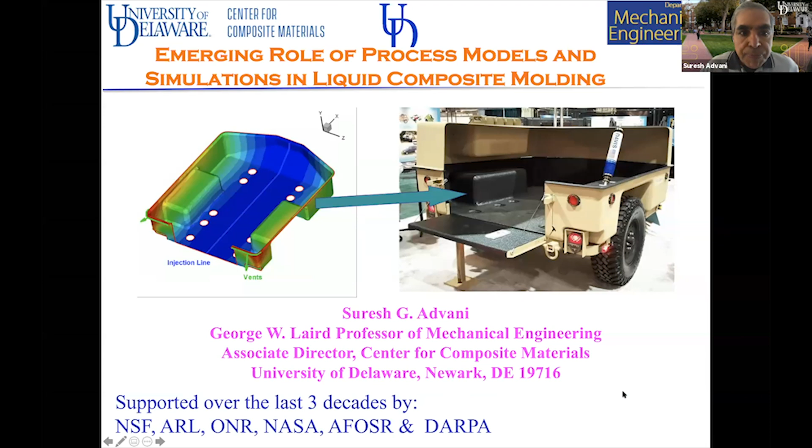So over the last 3 decades, I've been working in simulations of liquid composite molding, and I'll talk about what I've been doing. But before that, I just wanted to show you some history.

The Composite Center started in 1974 at Delaware. I think it was the first composite center. Then in 1978, Professor Pipes became the director and helped us win the NSF Center for Excellence ERC, the first ERC ever. After that, the center had never looked back with that momentum.

It continues to grow and continue to be recognized as a Center of Excellence by various agencies.

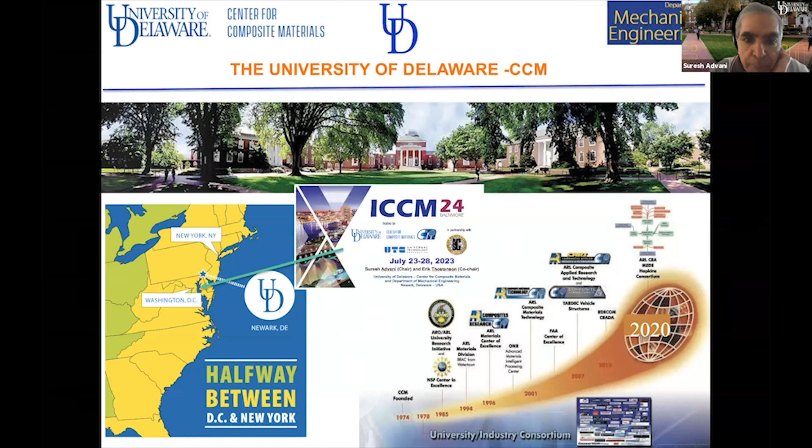Also, the next ICCM, the International Conference on Composite Materials, will be held in the USA, in Baltimore, in 2023. As you know, Baltimore is very close to Delaware, only 60 miles, and we weren't big enough to have such a big conference. One of the reasons we wanted to do this is because it's going to be the 50th anniversary of the center.

So, of course, before I start my talk, I want to really recognize all the real stars over the years, my graduate students and postdocs who have really contributed to everything I'm going to be talking about today. If it wasn't for them, we wouldn't have much to talk about.

So today, my goal is to give you a takeaway message: to demonstrate that process models and simulation do contribute to advancing and making manufacturing efficient. Today they're quite powerful tools, ready for you to use and build on to address the current manufacturing challenges in liquid composite molding. So that's going to be my takeaway message.

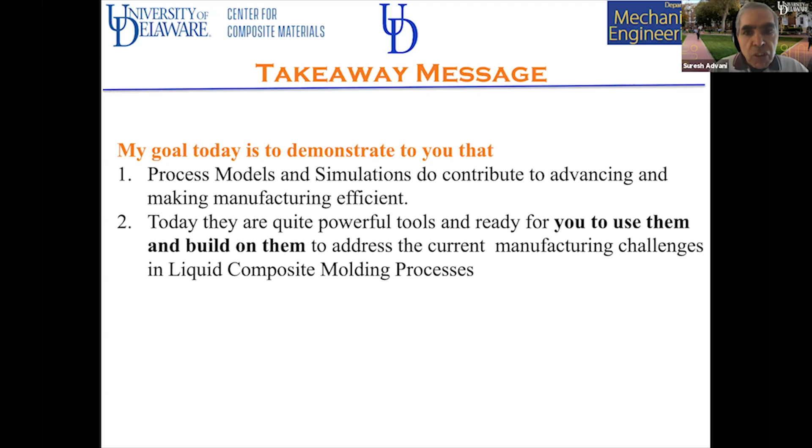For those not familiar with liquid composite molding, it's a family of processes where you have a dry fabric and you inject the resin into it using some sort of pressure or force. The most common one is resin transfer molding, where you have two rigid tools and you compress your fabric while injecting the resin under high pressure into the mold.

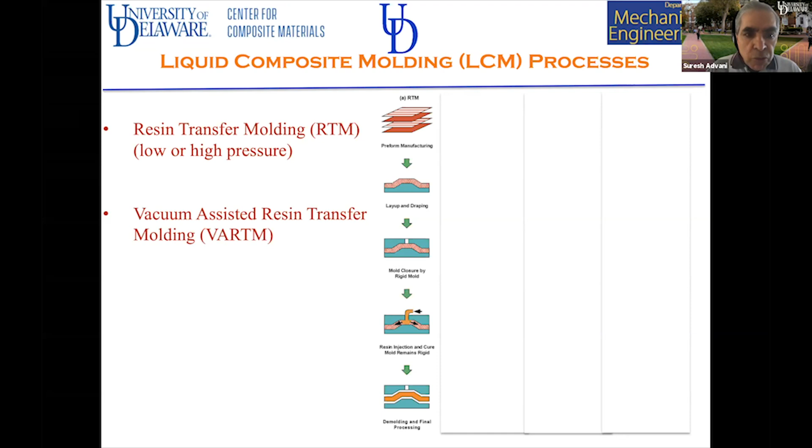Now, of course, you couldn't make a wind blade like that because the mold would be huge. So vacuum assisted resin transfer molding allows you to make large parts by, instead of pushing the resin in, pulling the resin in with just 1 atmospheric pressure. So you don't need a rigid top to keep the pressure in, and that's the VARTM process. Usually, because you only have 1 atmospheric pressure, you use a distribution media that allows the resin to flow into various corners of the mold. I'll talk more about it.

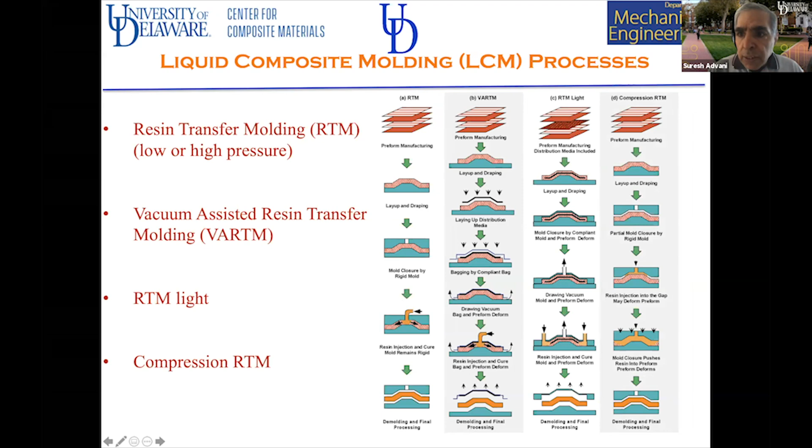Then RTM Light is a variation, kind of in between the two, where you put a compliant tool on top which allows you to normalize the pressure. Compression RTM is more important here because it reduces the cycle time. Instead of having a distribution media, it has a gap - you inject the resin into the gap, close the mold, and then push the resin into the dry fabric.

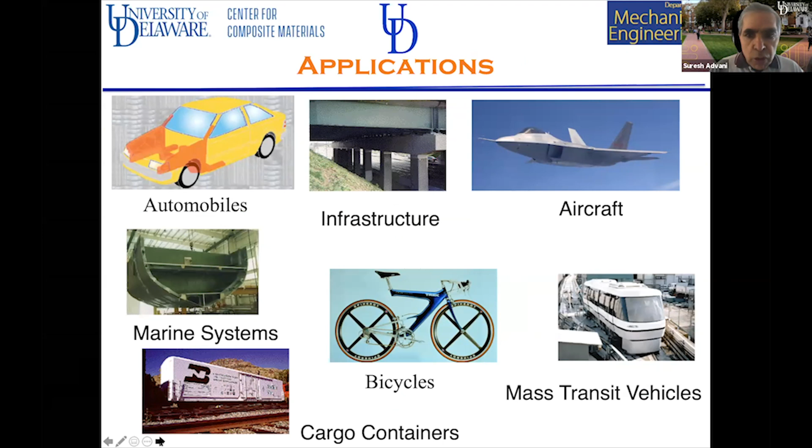So those are some of the processes, and you can make very complicated parts with them, applicable to aerospace, automotive, and sports industries, and you can make very, very large parts with that. As I said, RTM and VARTM are the two main processes I'll talk about.

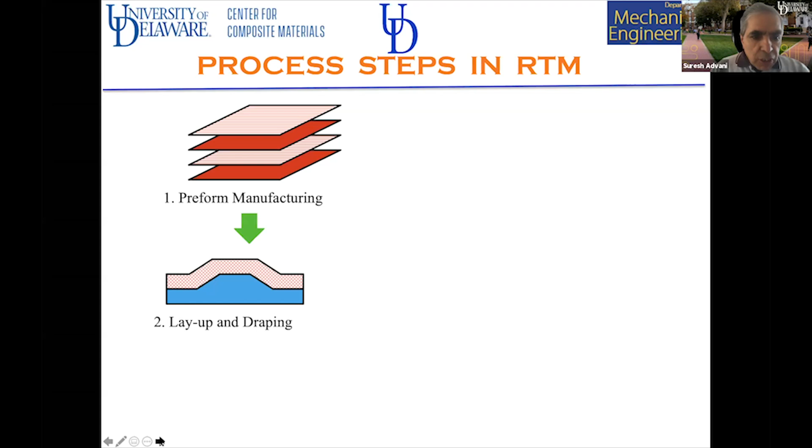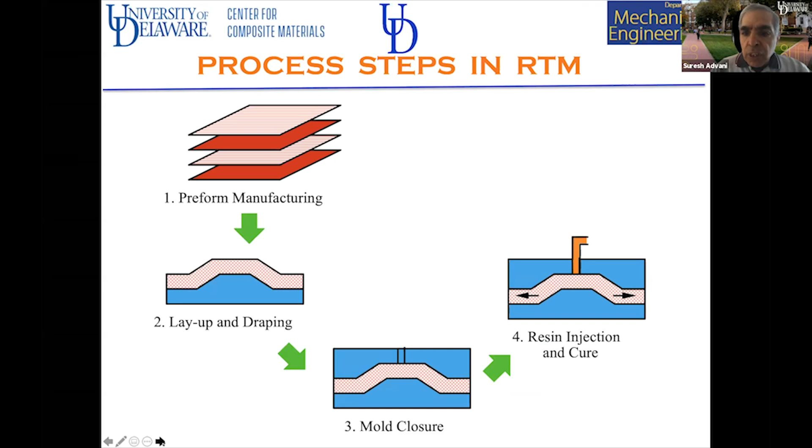So I'll give a little more introduction here. You take the fabric, place it on a tool, then close the mold with the rigid tool, then inject the resin until it reaches the vents, and keep the mold closed until the part cures, then demold the part.

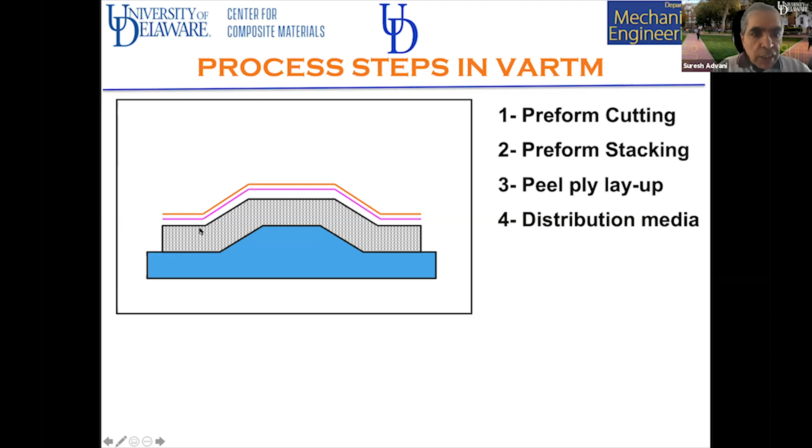In VARTM, you have basically the same thing where you have a rigid tool on which you lay the fabric, and then a peel ply - everything above the peel ply you discard. After that, you have a distribution media that allows the resin to flow faster in the in-plane direction, so all it has to do is go through the thickness direction. This allows it to flood the top surface, which is helpful.

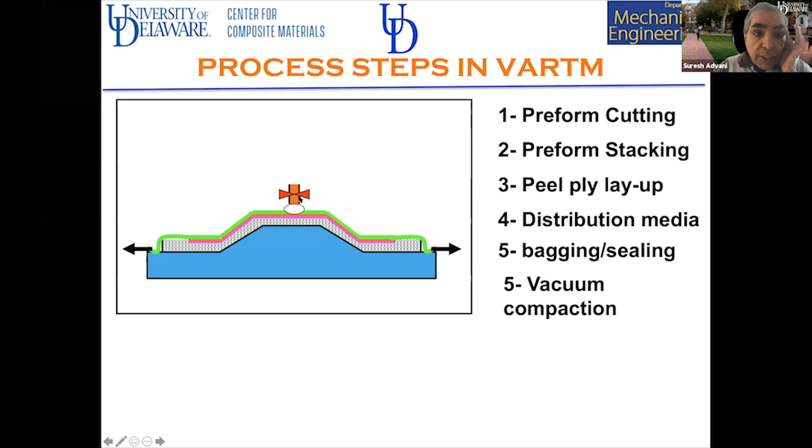Then you put a vacuum bag on top of it and apply vacuum to compress the preform to get the fiber volume fraction. After that, you open the resin, which is at atmospheric pressure, and it starts to fill the mold and go toward the vent. You keep the vacuum on until the part cures, and then you demold it.

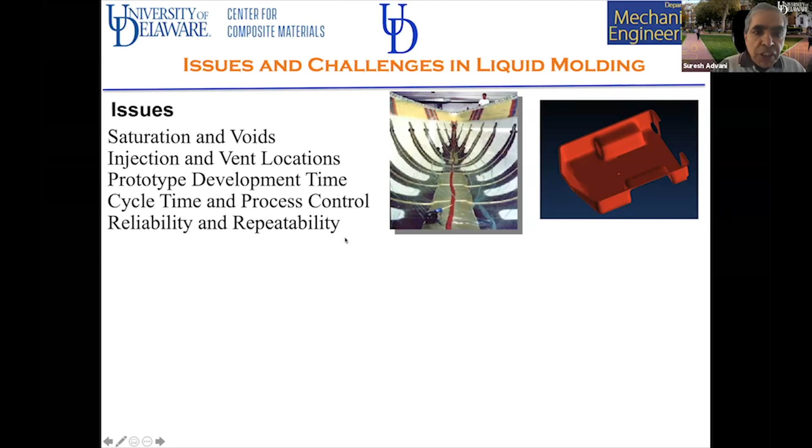So what are the issues in this process? Can I saturate all the fibers, all the regions in between the fibers? Otherwise I'm going to have a lot of voids. Where should I locate my injection and vent locations? How much time will it take to develop a prototype? How do I reduce the cycle time, and can I introduce process control? The biggest issue is reliability and repeatability - can I repeat this part?

So there are many challenges, and one can address these by integrating flow modeling in prototype design, accounting for material and process variability, dimensional tolerances, and introducing process control and automation so we can manufacture large and complex parts. Hopefully I'll show you some examples today that convince you we are very close to being able to take simulations and address all these challenges.

So, in mold filling, why do we need a simulation? The reason we need a simulation is because when you close the mold, you cannot see anything inside.

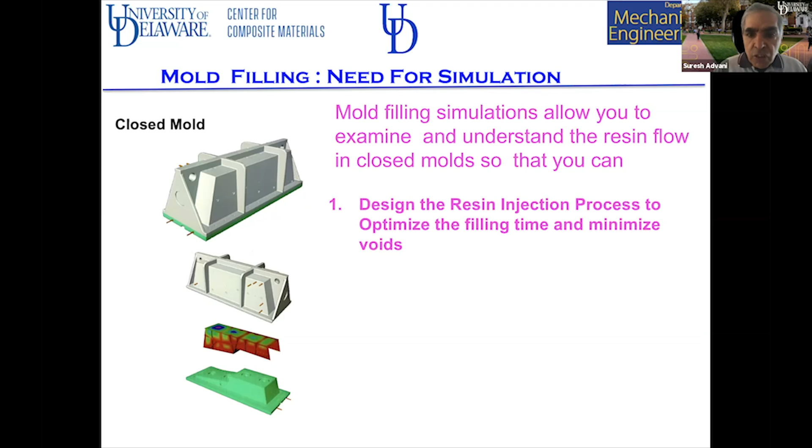Once you wait for the resin to come out of the vent and you open the part, you may end up getting voids in the part, and then you have to throw away the part because it's already cured. So simulation allows you to see inside and design resin injection processes to optimize the filling time, minimize void, reduce the development time, integrate the process with the mold design, and address the material and process variability by passive control to improve yield, or have active control and automation.

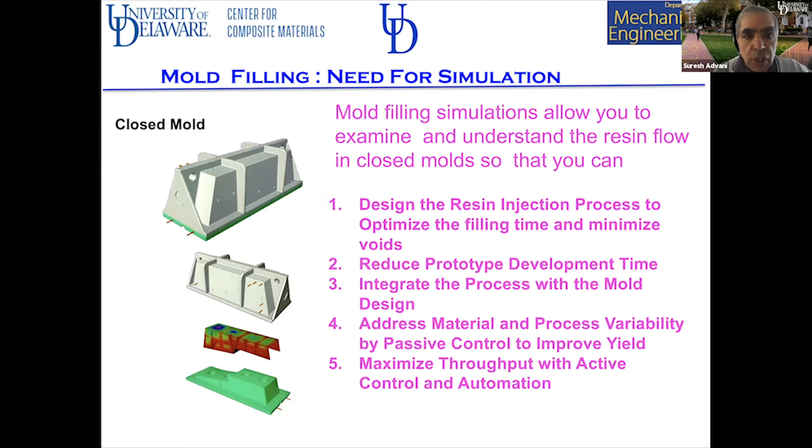I'll show you examples of those. My second thing is to talk about the science behind this modeling and simulation, and maybe more about the features of what it can do.

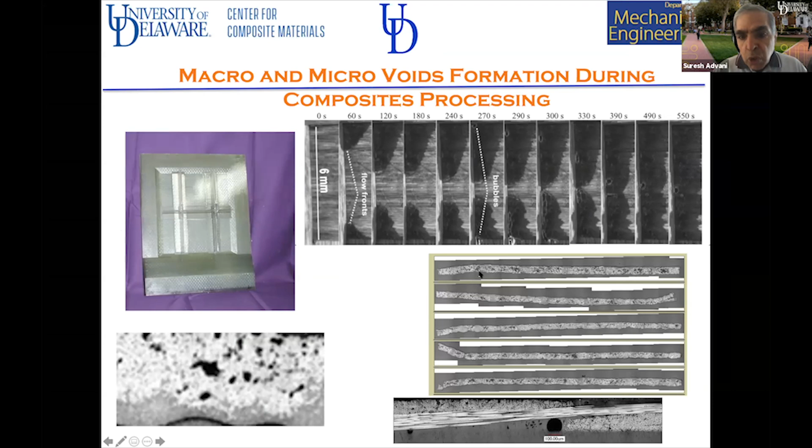As you can see, you can have micro scale or macro scale voids, because you can end up getting voids inside the fiber tows, or have dry spots like this, which you can see by the naked eye. And sometimes you have micro voids, which you have to go under the microscope to see. So this is the issue we want to address.

So we'll address this at three levels. At the macro scale modeling, where we can predict the dry spots and the voids, and how we can use design, optimization and control.

Then we can go a level below and couple the two. So the level below is that you have fiber tows, and then you have the region in between the fibers. You can look at how you're saturating the tows along with creating the dry spot. These two are connected, so we can look at dual scale flows.

And then finally, at the micro scale level, within the fiber tows, you can get voids because of how the resin spreads, what is the capillary effect, and so forth. So the idea is that you can address all of these three issues through simulation.

So first we look at the macro flow. At the macro flow level, we model the flow as Darcy's flow through porous media. Basically you inject the resin at some point, and as the resin moves, it follows Darcy's law, which is the average velocity is proportional to the permeability of the fabric and to the pressure gradient. Then you combine this with mass conservation to get a governing equation in terms of pressure.

With the boundary conditions, at the inlet you can have a constant injection pressure or pressure changing with time, or you can have a flow rate changing with time or a constant flow rate. So you can do all of that.

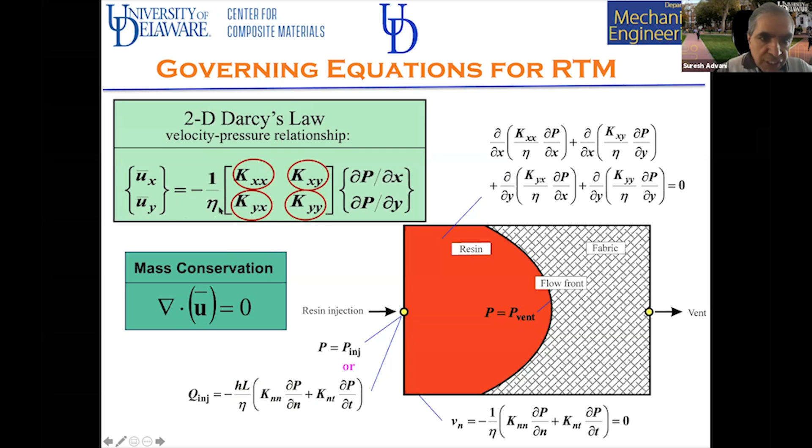And you can do this in 3D flow, because the flow is also going through the thickness as you're flooding the top surface. So now here you have more permeability values to find: the permeability in the X direction, Y direction, Z direction, and if the fabric is not aligned in the flow direction, you also have these cross permeabilities to find.

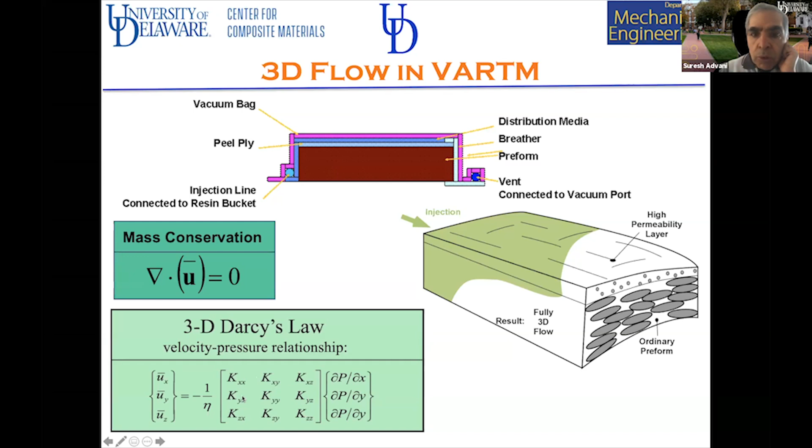The way we do it is we don't remesh the problem. You create the mesh and then associate a fill factor with every node. When the fill factor is zero, that means there is no resin there. If the fill factor is one, that means it's filled with resin. And when the fill factor is between 0 and 1, you know that node is on the flow front. So we use that idea and avoid the problem of remeshing.

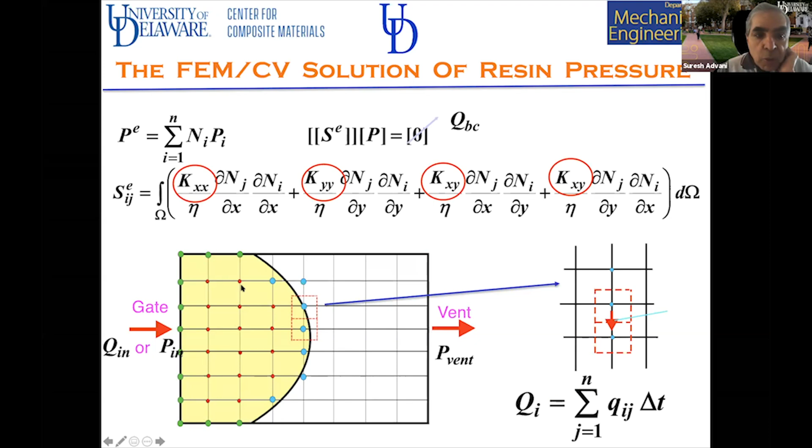And obviously, we need to know the permeabilities of the elements, so you can actually have element-wise permeability, which can change in each element.

To measure the permeability, there are all kinds of measurement benchmarks going on right now, because this is a problem where every time you do an experiment, you get a different answer. So you have to come up with a very good way of doing this.

We have a few techniques we've come up with, where we look at the top and the bottom, and then use that to measure the permeability in the Kx, Ky, and Kz direction. Notice here that usually the Kzz, the through-thickness permeability, is much, much lower than the Kx and Ky, up to 2 to 3 orders of magnitude lower.

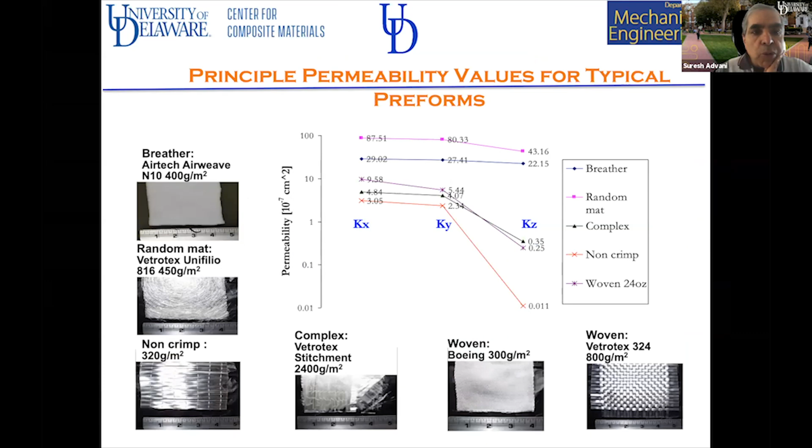And this, in certain contexts, could be an issue. And then, of course, as you lay the fabric, the fiber direction changes and the fiber volume fraction changes.

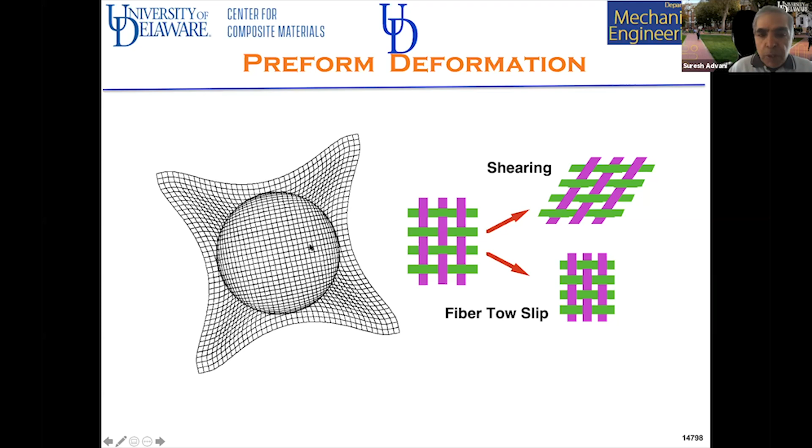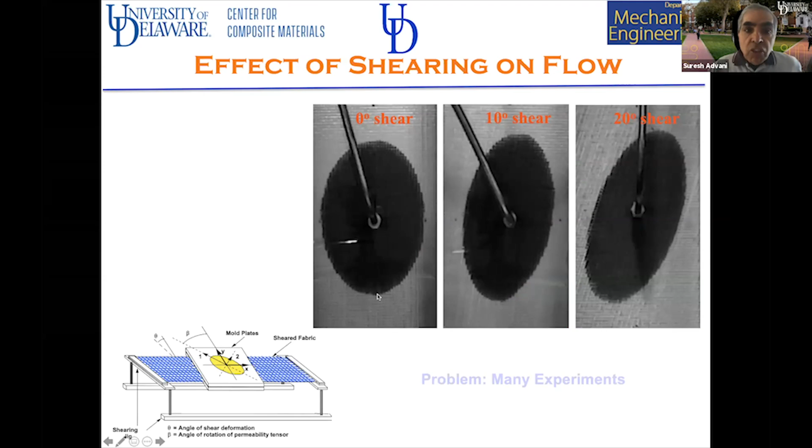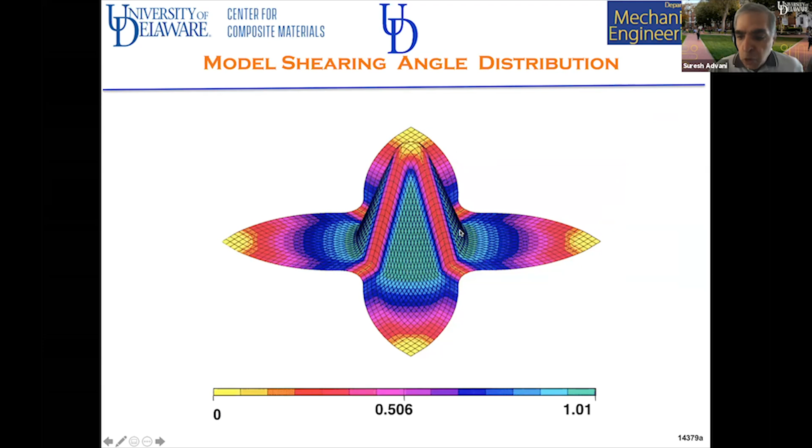So you have to couple this with a drape. When you drape this, as you can see here in the experiment, as I shear the fabric, the direction of the flow changes, and also the fiber volume fraction changes. So one needs to be able to not only measure the permeability in the mold, but then have a way to take something like this, drape it, get the fiber volume fraction of the draped fabric, and convert that into permeability values before solving the flow problem.

One of the things we've been recently doing with one of my collaborations in France is using a paper to look at the pressure that is applied on the fiber tows. From that, we can reconstruct how the fabric looks inside the mold when it is closed. This will allow you to get a much more accurate permeability value.

And so once you have the permeability values and the mold designed, you can use any kind of software to create this GMesh or any CAD profile. And then if you need to drape the fabric, you'll have some way to convert that. You input that into the simulation model, and the simulation allows you to find flow fronts, the pressures, temperatures, and also the saturation of the tows.

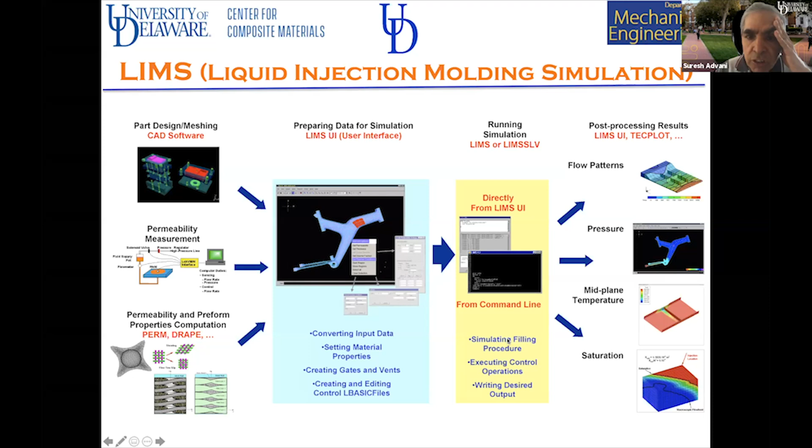It's a nice research tool, because you can actually write sub code that will allow you to introduce control. It will also allow you to change the filling procedures and so forth. So that's one of the big advantages.

And over the years, we have validated the simulation with all kinds of experiments that we've done. This is like a 4 foot by 3 foot window frame, and you can see on the left is your experiment, on your right is the simulation.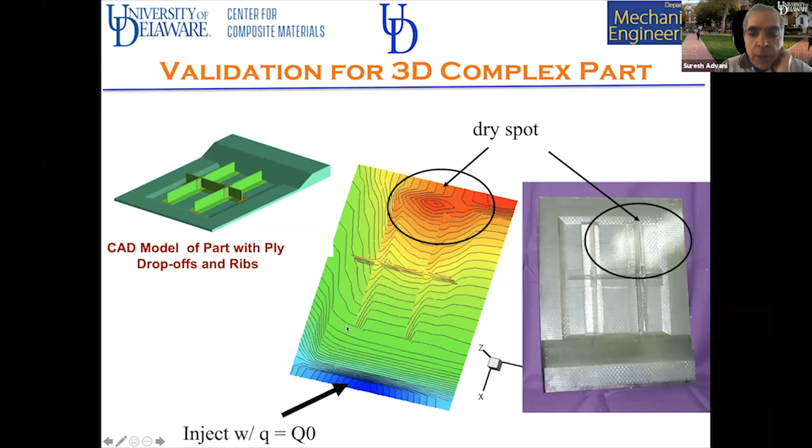We were able to even predict a dry spot that happened in this part by applying those same conditions. It can do any complex 2D and 3D parts without any problem. Many years ago, we were already able to do that.

The other thing I was talking about is that you can write a small script file which allows you to do things inside the simulation. For example, if you're trying to find the best gate location, you can write a small script and keep changing the gate location and finding the fill time. It can do this all in the background to tell you which is the best gate to use.

Now, of course, you don't want to do this in a brute force way. You want to use some sort of techniques that allow you to find the best location to fill for the least amount of fill time.

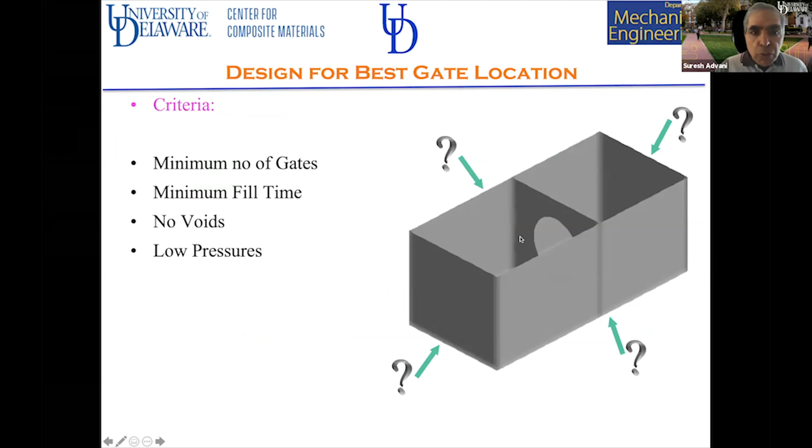So if you have a part like this with 3,000 plus nodes, instead of running the simulation 3,000 times, you can use techniques such as branch and bound search, where you break the mold into different sections and keep moving toward the one giving you the lowest fill time. That way, you can end up with the actual region that has the gate giving you the minimum fill time.

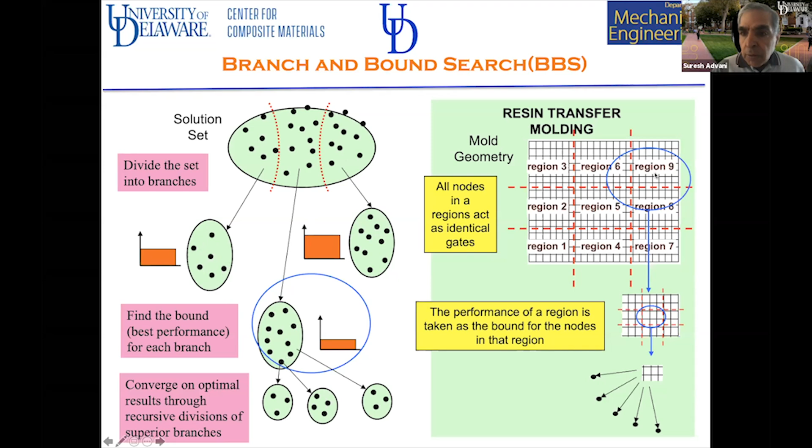So you can see here the branch and bound method only took 57 simulations, as compared to if you were to do this by brute force, which would be 3,378.

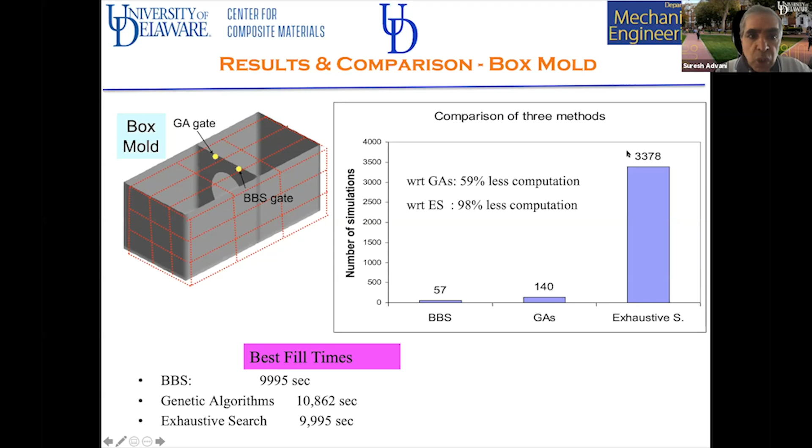If you use genetic algorithms, it takes about 140 or so simulations, and it doesn't give you the exact gate location, just close enough. Whereas the branch and bound method gave you the location that you get from 3,000 simulations. So this shows how you can use optimization with it.

Now going to the next level, the mesoscale modeling. How do we model flow inside the fiber tows? If you look at this mold, it's much darker here compared to here because the fiber tows here are not completely filled yet, since you have bigger gaps between the fiber tows. So the fiber tow permeability is lower than the regions in between.

If you don't use dual scale, then LIMS assumes that the tows and the region in between the tows fill at the same time. But if you turn on the dual scale feature, it will actually tell you how these tows are getting saturated while the resin is moving into the mold. As you can see, these are all dual scale fabrics.

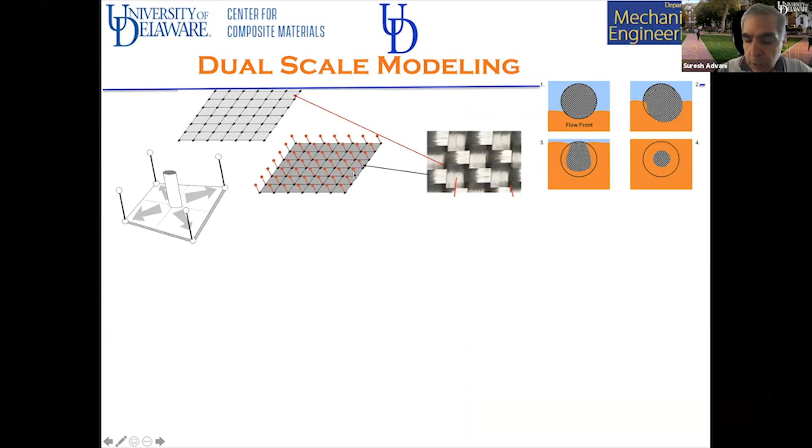So in the simulation, for the 2D or 3D elements of the mesh, we attach one-dimensional elements that represent the fiber tows. They have their own permeability and their own volume to fill. But now, we need not only the permeability of the bulk that you measure from experiment, but also the permeability of the tow. So you need two parameters.

Let's say you inject from here, and as the resin is filling the mold, the red area is where all the tows are filled. Between the two black lines is where you have partial saturation of the tows, as seen here. When this front reaches the vent, you might think the mold is filled, but you still may have some unsaturated tows. So you have to leave the vent open so that the resin bleeds through it until this red front reaches the other end, which will ensure all your tows are filled. So it can give you that sort of information if you know your tow permeability.

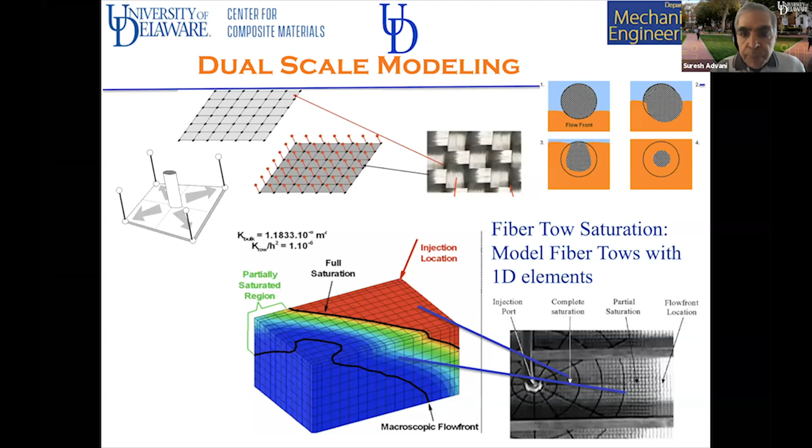So you'll say, okay, now that means I have to measure two values. We came up with an analytical method to measure both values from one experiment. You inject the resin at one end at a constant flow rate, and the pressure profile will be linear with time at the inlet if it's a single scale fabric. If it's a dual scale fabric, you'll see the pressure profile is actually a drooping pressure profile because the tows are filling at a different rate.

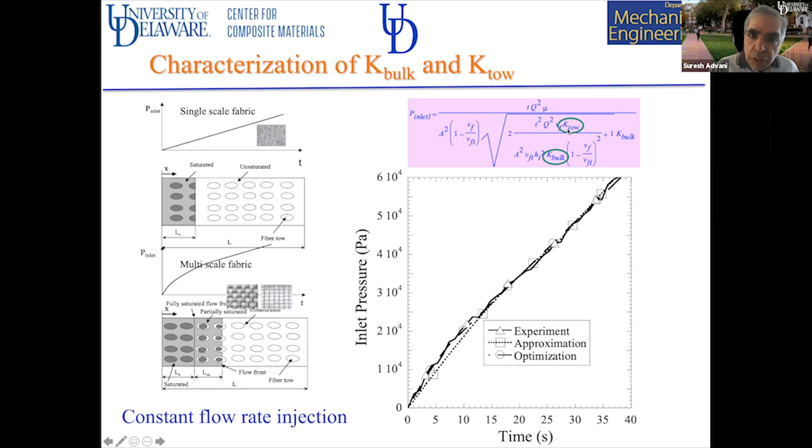So what we do is experimentally measure this profile, and we have an analytical expression for how the inlet pressure changes with time as a function of the tow permeability and the bulk permeability. We try to match that by changing these two values, and by doing so, we can match the inlet profile and get both values from the same experiment. It's not as hard as it seems because usually the slope at the inlet is more representative of the bulk value. So from this slope we get the bulk value, and then you just play around with the tow value till you can match the pressure profile.

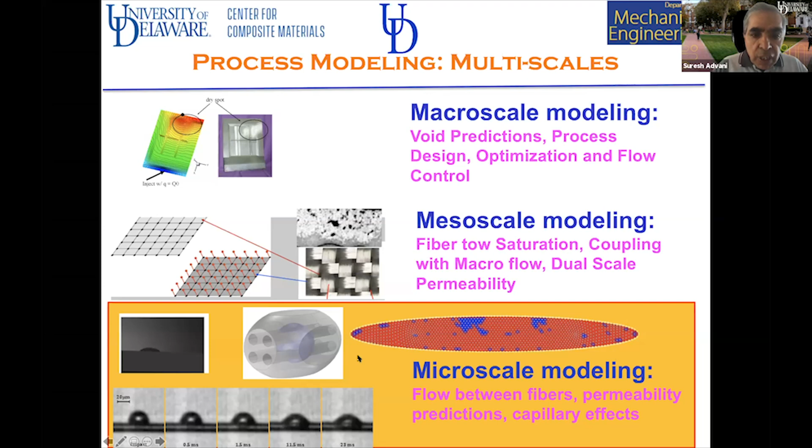And then finally, the third scale that I'm looking at is the micro scale, what happens because of the capillary effects, and how does the capillary play a role here, and what about the contact angle that the resin has with the fibers.

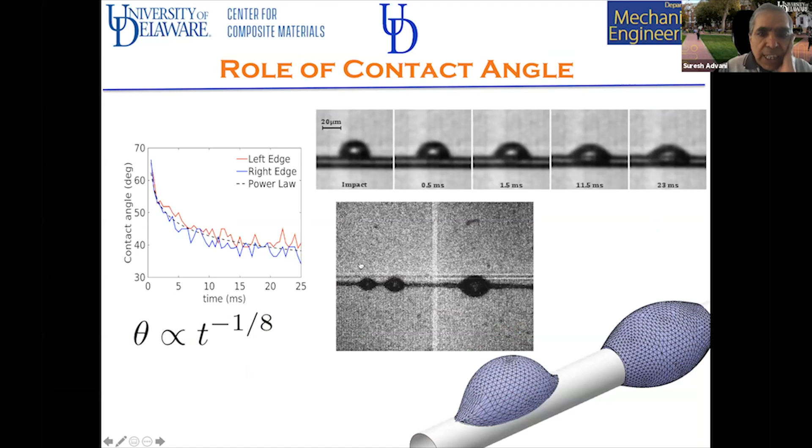You can actually measure the contact angle on top of the fibers, and usually as you change the contact angle, you'll see the average capillary pressure changes. So we were able to simulate that and come up with an average capillary pressure depending upon the distance between them and the contact angle. We show here how the average capillary pressure changes with fiber radius and with the contact angle. Also, as you move one fiber closer to another, you notice that the capillary pressure will also change.

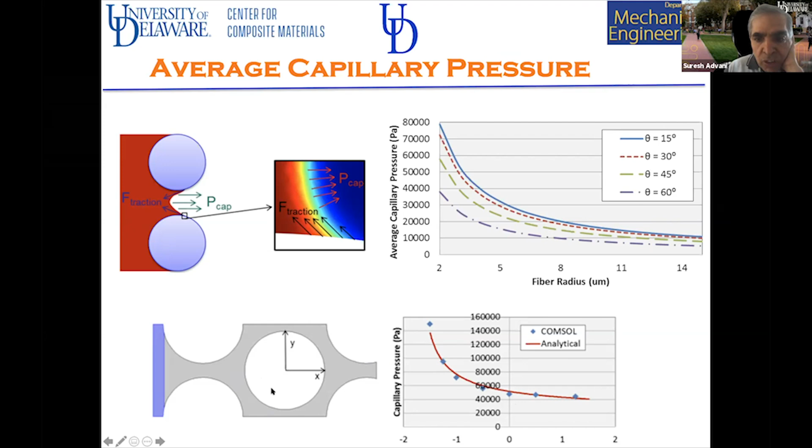So basically, as the fibers move closer, it is higher, and as you move it away, it is lower. So you can even address those things.

Here, what I'm showing you is that we have a way in LIMS to attach elements where we can assign capillary pressure, and then we can look at the effect of capillary pressure as compared to the injection pressure. On the top, when you're looking at the tow saturation where no capillary pressure is applied, you can see that you have a much larger region that is empty, whereas when you account for the capillary pressure, a much bigger region is filled. So the difference is not that huge, but still it can be accounted for.

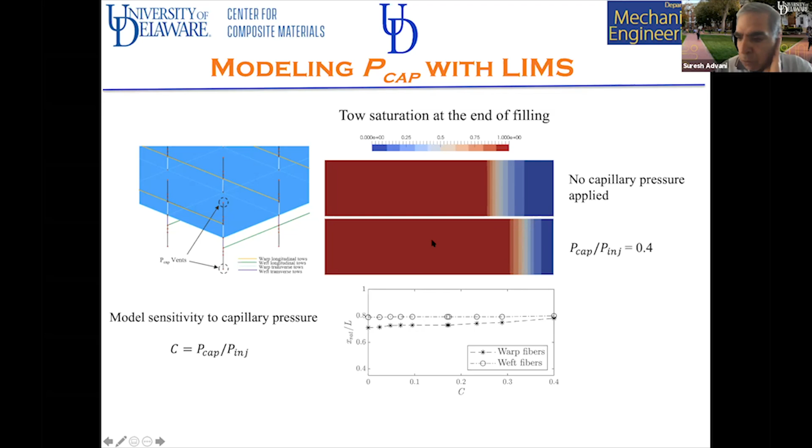Okay, so that was about the simulation. Now, how do we account for material and process variability in the simulation?

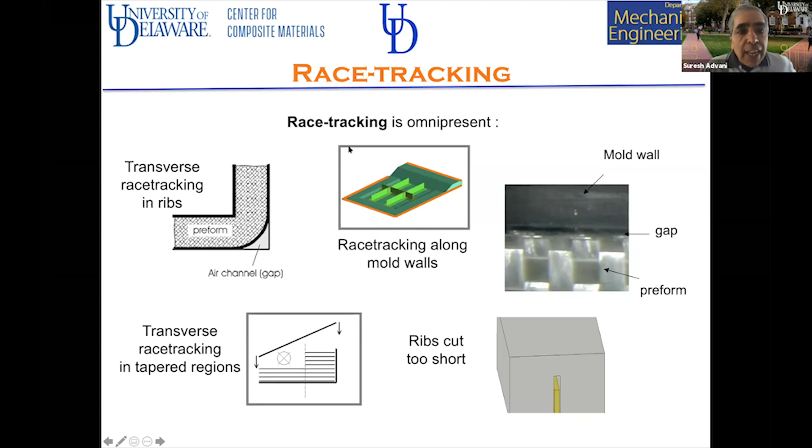What happens in these processes is that when you lay the fabric, there are gaps, there are channels, and the problem with that is that the resin will go faster along the channels, so the permeability is much higher, and we call that race tracking. And that race tracking is present everywhere. There's nothing we can do to prevent it.

You can see how the race tracking will make the flow go faster along the edge, and that can mess up your part, because let's say you put in a vent here after you did the simulation with no race tracking. The vent should be here, the last area to fill, but because of race tracking, the resin went on the top and the bottom, and it arrived at the vent sooner than it was supposed to. Even if you let the resin bleed, you cannot completely get rid of this void. So accounting for race tracking becomes important.

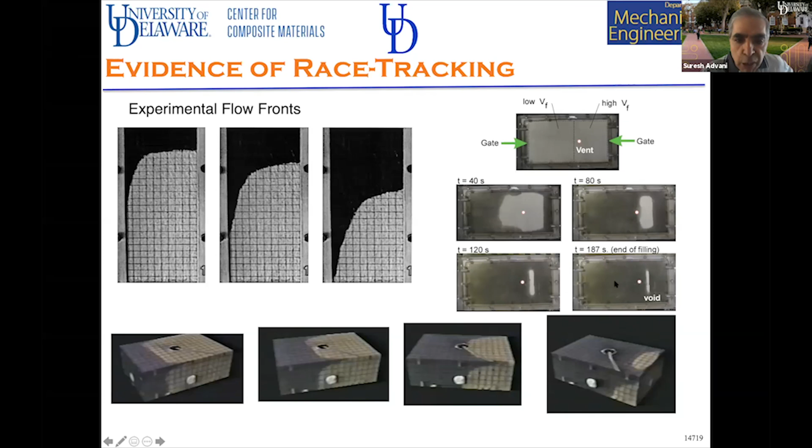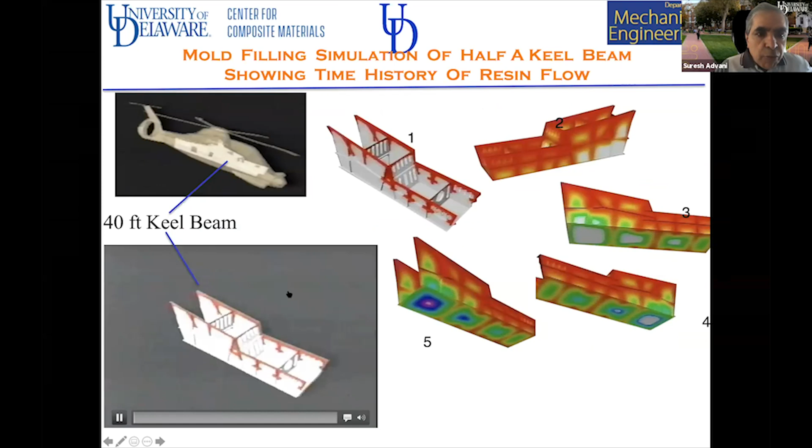As you can see here, this is a 40-foot keel beam that was made by RTM, where the race tracking was not accounted for. After the fact, I put in the race tracking, and I was able to predict where the voids were at the bottom, which is what they were getting because they had run the simulation without using the race tracking.

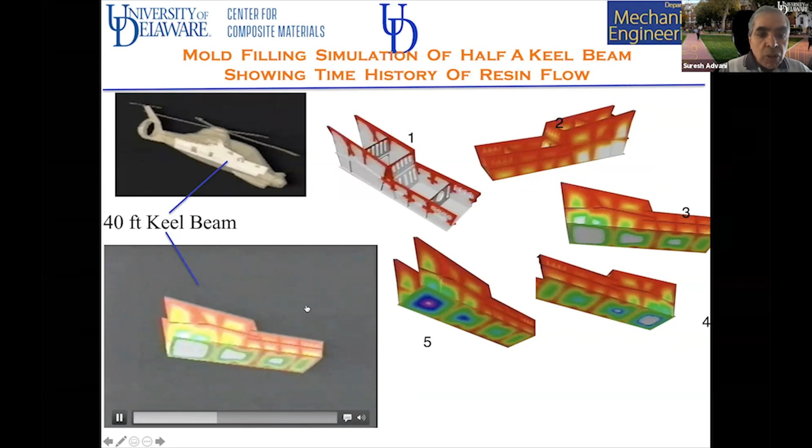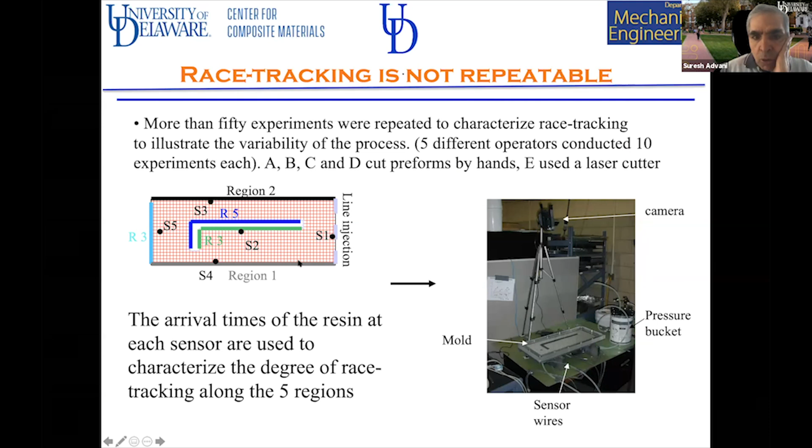So I wanted to know, okay, so what do I do with race tracking? How do I know how much race tracking is taking place? Can I kind of control it? Can I measure it? So I had five students actually do the same experiment, an L-shaped insert where they put the fabric. So you will have race tracking along 5 regions - that's along this region, top and bottom. And so what we did was each student did 10 experiments. And this is edge 1, 2, 3, 4, 5.

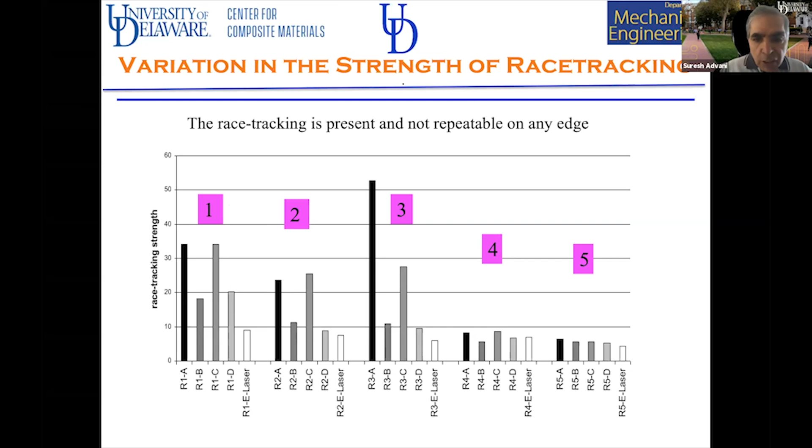And these are the students. One of them used a laser cutter to cut the fabric. But you can see that this is the average of 10 experiments, and it's not repeatable at any edge. I mean, it depends on how people cut it, how they place it, and that's what creates the variability. So how can we use the simulation where we can account for this variability and improve our chance of success?

So let's say first, let's do a passive control when you have a distribution media. You can put the distribution media that covers the total top of this mold, okay? Or you can use simulation to plan the methodology.

Here is an example where I have this A-frame, and I'm going to put the distribution media on top and just cut the distribution media around the A-frame because I don't want to put it on top. So this is what they will normally do, just cut around the A-frame. Now I'm going to make a slight change in my design where I'm going to let this distribution media be cut all the way to the end here.

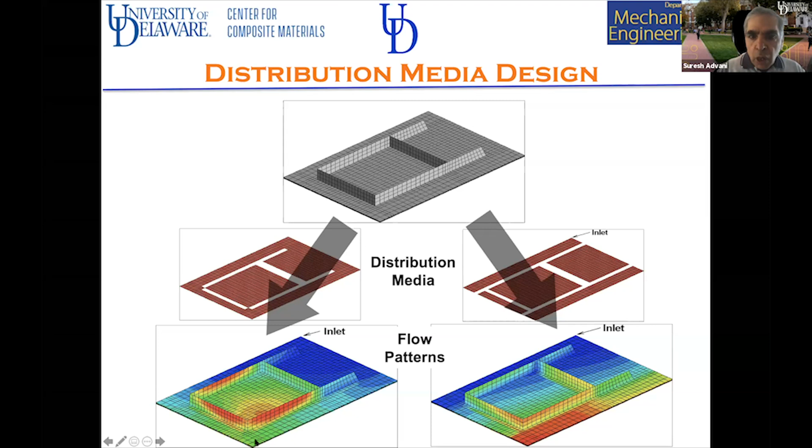I'm going to inject from this end, and my vent is going to be the other diagonally opposite end. So here is the case where you cut it around the A-frame, and now you're filling this. And as you fill this, when the resin arrives at the vent, which is this end, you'll see that you won't be able to fill this area. Even if you let it bleed, there will be some region that will be empty.

Now, if you look at just the slight change in the distribution media, making that slight change is the thin line between your success and failure. So there are many simple things you can do when you are manufacturing with composites.

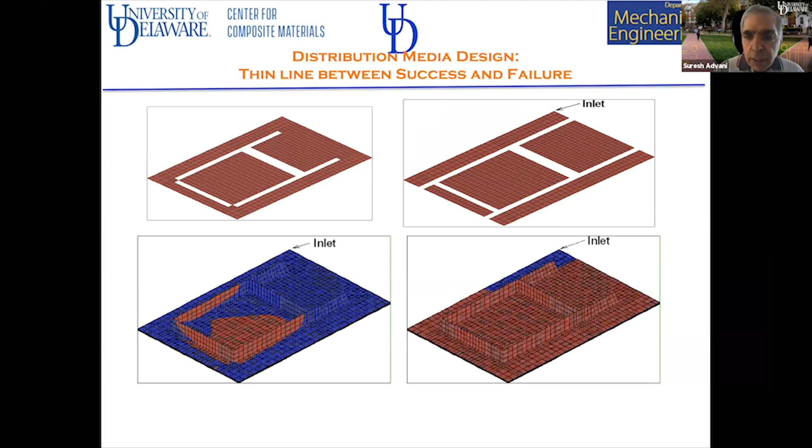Now, we have also done case studies where we allow for race tracking. So we say, what is the best distribution media when you are also having race tracking? I don't have that slide here as I had limited time to talk, but we can do that.

Here is the case where, if you're going to have race tracking either weak or strong, you run simulation for no race tracking, introducing the flow on the left and the right. You can have different cases: no race tracking, weak race tracking on the top, strong race tracking at the bottom, and other permutations. You can do all those permutations, and you can see the flow fronts look very different for all of them.

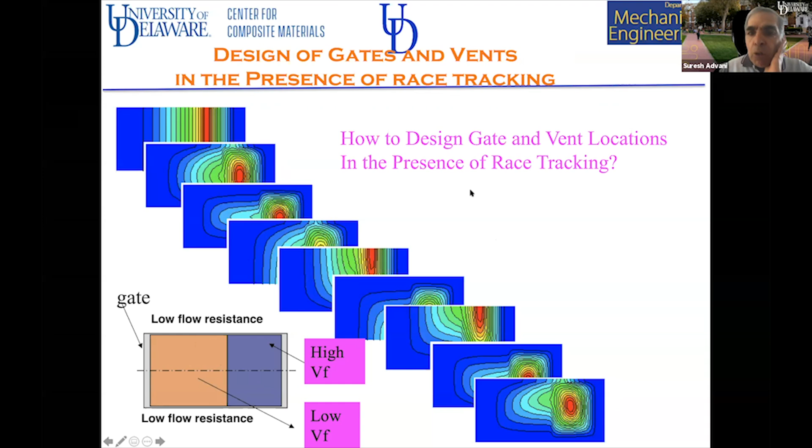So how do you design gate and vent locations in the presence of race tracking? What we did was we said, okay, let's identify the edges where the race tracking will occur. Then we also assign a probability—like, is it most of the time there will be no race tracking? Some of the time there will be high race tracking?

So you have that probability associated with it, which can actually come from manufacturing data as they're making it. And here's where AI and all those things can also come in handy.

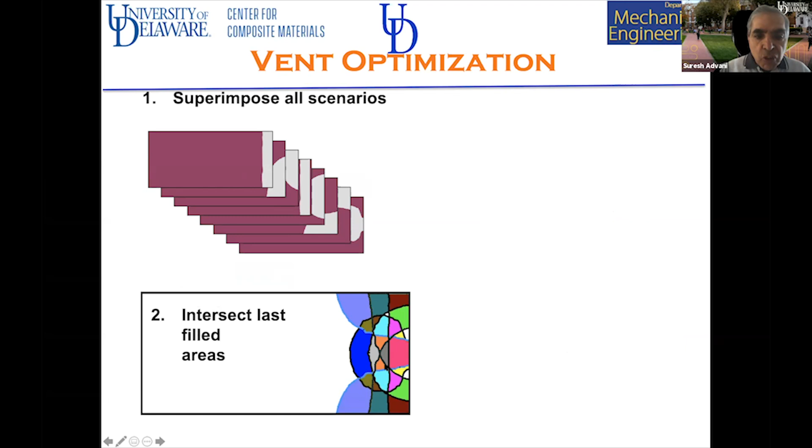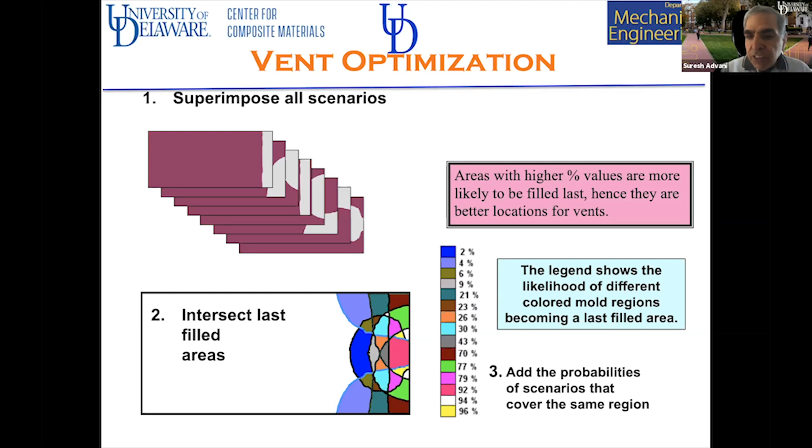And you find out which are the last areas to fill, and then you superimpose all the scenarios with the weighted probability, and then you find out where the resin will arrive last. The highest probability areas—that's where you'll place your vents—and just improve in terms of using this.

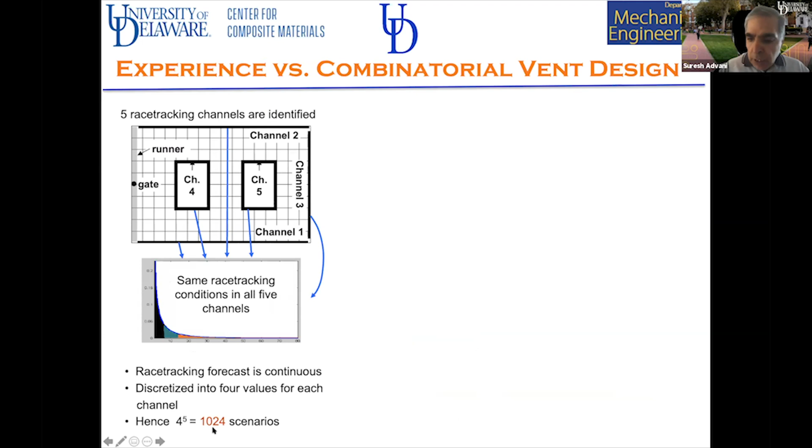So here's an example where you have 2 window frames. You could have race tracking along the window frames, with the same probability of race tracking. So you have 5 edges where there's race tracking, which is 4 to the power of 5. We run it 1024 times.

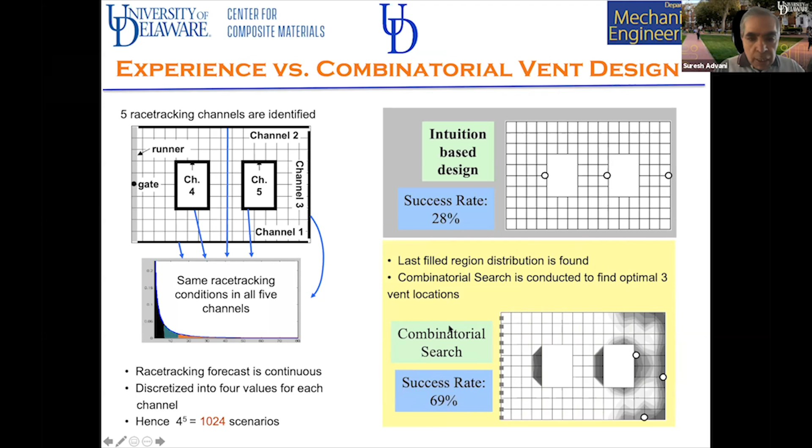Now, of course, this is passive control because I can't get 100% by doing this. So what you can do to get 100% yield is active control, which actually lends itself to automation.

So what you do in active control is you need sensors in your mold. You fix mold geometry, you find out what are all the possible disturbances that can take place, you run the simulations, you optimize where you're going to put the sensor locations that will allow you to identify the disturbance. Then you decide what control action can you take to make sure that your mold will fill due to the disturbance as well.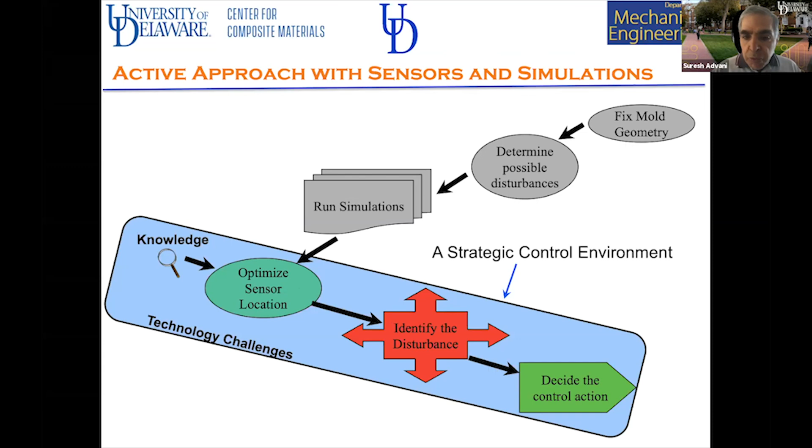So there are many types of sensors available that can lie flush with the mold: point sensors, lineal sensors. There are also textile sensors.

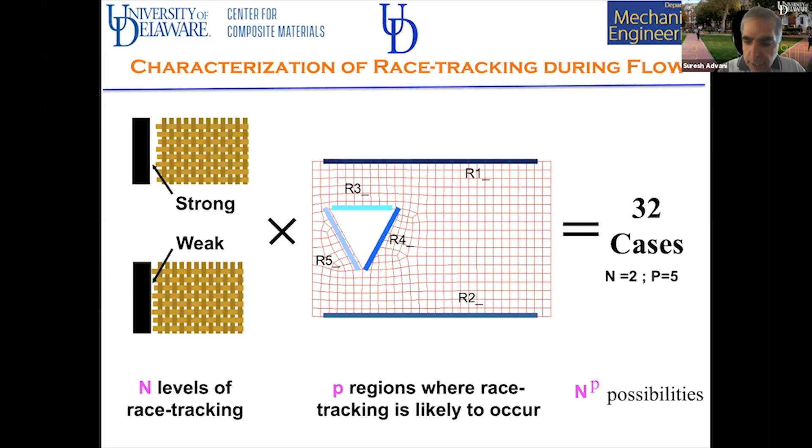Here's an example that we did on the ONR program where you have a weak race tracking or a strong race tracking, depending upon how well the edge is fitted here. And there are 5 regions, along this insert and top and the bottom. So you have 32 cases, either with weak or strong, so it will be 2 to the power of 5. And then what you do is you run all the 32 cases, and then you figure out where can I put the sensors, so very early on in the process I'm able to detect which of the 32 scenarios, or which scenario closest to the 32 scenarios, is taking place.

So now the molder, all they have to do is just put the fabric in, and they don't have to worry which of the 32 scenarios is taking place. The LabVIEW automatically takes care of that.

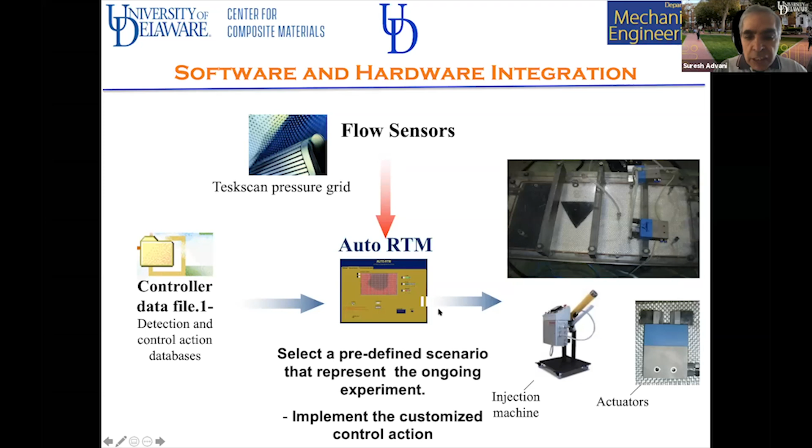Now what we did was we did this experiment 15 times, and we didn't know which scenario was taking place, and in most of the cases it filled. In one case where it didn't fill was because of the sensors failed - it wasn't the simulation that failed, it was the sensors that failed. So it told us you need to have more redundancy in the system.

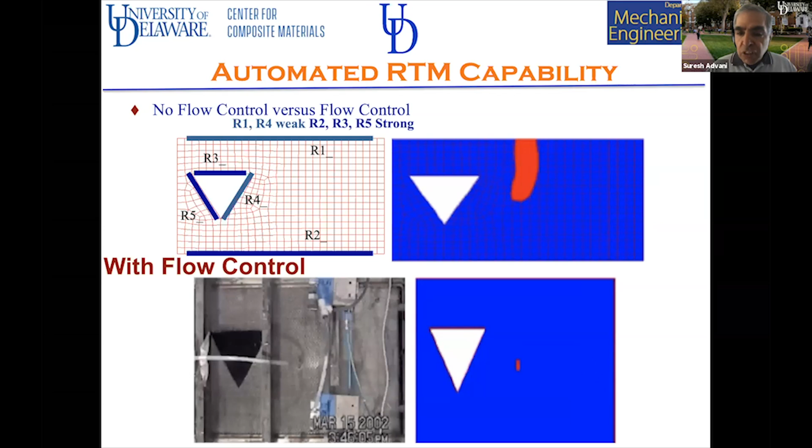So this also lends itself to automation. So you can account for the variability that happens inside the composites by using sensors and then having some control schemes to design them.

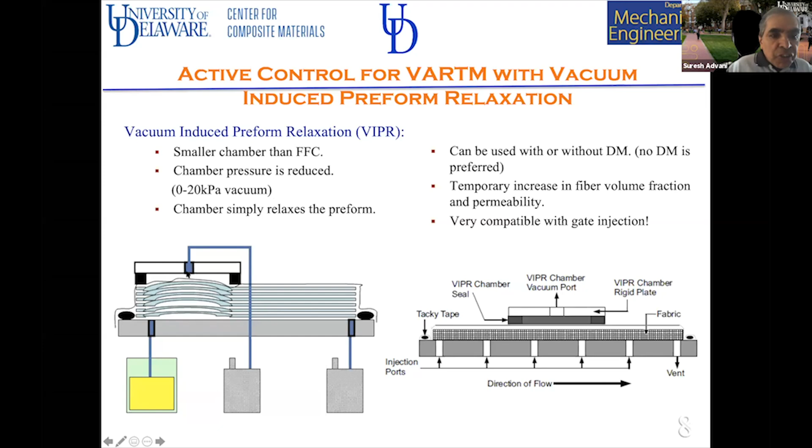So, but how to do this in VARTM? In RTM it's easy because you can push the resin with pressure. So in VARTM, we came up with this idea where what you can do is, because the entire mold is under vacuum, I can use a little chamber to release part of the vacuum. By releasing part of the vacuum, I can increase the permeability locally. And when I take away this chamber, it will compress to the same fiber volume fraction. But by having this there, I'm attracting the resin to come over here because there is less resistance.

So we built this setup with gantries and with a robotic arm that would do that on top of the mold, and we had that chamber, and also we had a camera on top that told us where the resin needs to go, and then this information was put into a control loop in the controller of the LabVIEW. But here the difference was we did this online.

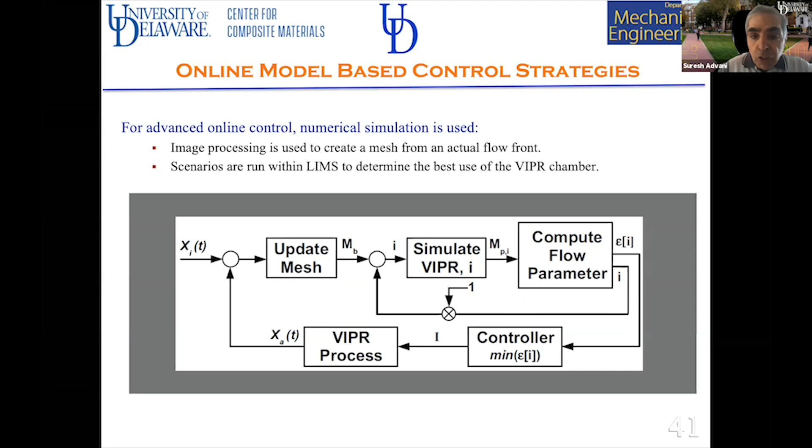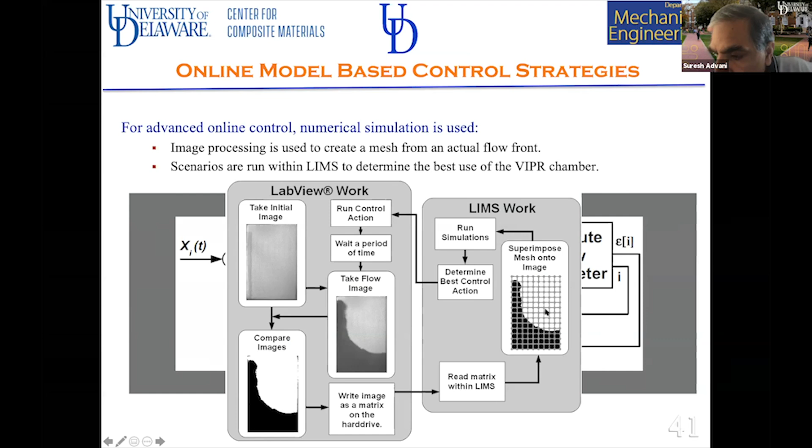So in the LabVIEW, we could look at where the flow front was. We take that image, we send it to LIMS. LIMS now starts from here, it will run a few steps to see what is the best course of action, or where does the chamber need to go, so that you are able to fill this without creating a void. And so this was all done online.

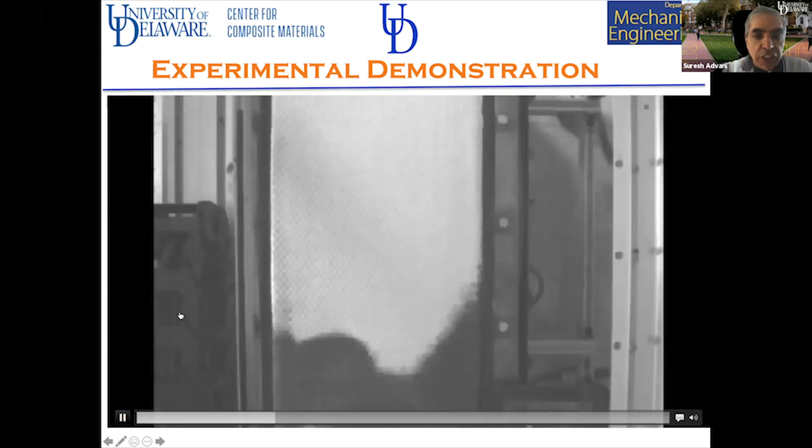And here I'm going to show you one of the experiments where there was race tracking along the edges, and you can see the chamber comes in to wherever there is less resin, and it releases the fabric to have a higher permeability.

And by doing that, you can fill the mold. So now you can also use this to accelerate your flow. And so these kind of things are possible to do.

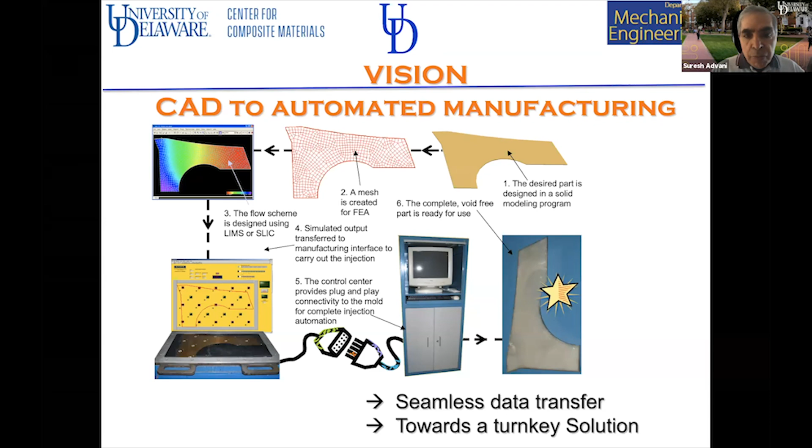My dream in general here is to actually have something like what you saw in the advertisement for Moldex 3D for the plastic industry, where the simulation is coupled with the equipment, so that in the end you can get a good part. The simulation becomes an integral part of the equipment with the sensors already built in, so it becomes a turnkey solution. We are not very far from it, but it is within reach now. So we can do that.

So this is my final slide. The takeaways from what I presented today are that we can mitigate costs with simulation to determine gates and vents, minimize filling time and voids, design process and distribution media for complex geometry, account for variability in process and materials, plan process with passive and active control, and integrate part design with the process. So these are some of the things.

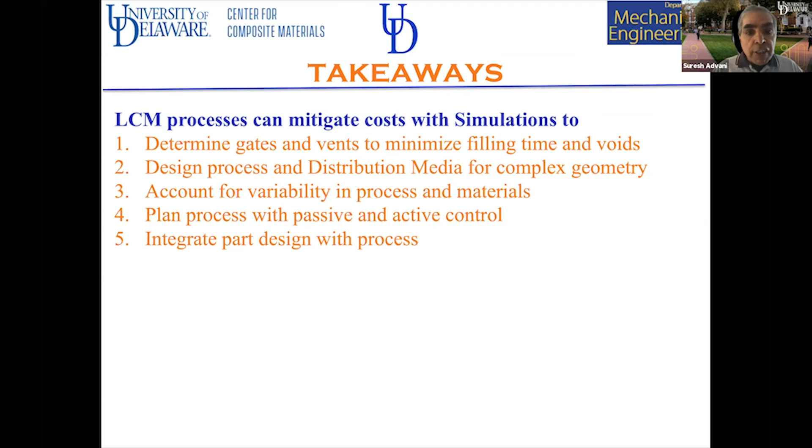And now with AI, you can also take data from the actual manufacturing line and use that with the simulations, rather than proceeding blindly, to keep improving your process as you go forward.

So thank you very much for listening, and I will be happy to answer any questions. I think I actually finished a couple of minutes ahead of time, so we'll have plenty of time for questions.

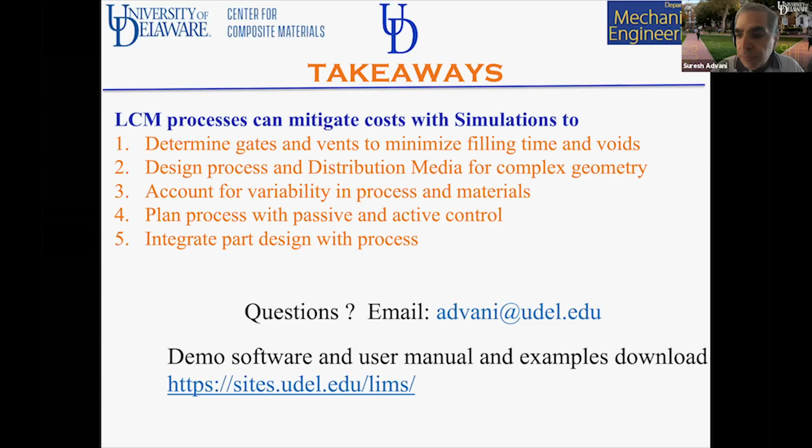Thank you very much. One of the questions that came along early on was about the ability to measure the pressure inside of the mold, and other questions related to permeability. So Professor Advani, if you could comment on techniques for measuring pressure and permeability, as those are critical inputs to the entire process. Yeah, so there have been quite a few studies where people have put in pressure sensors, such as pressure transducers, inside the mold to actually measure the pressure.

However, it's not an easy thing because egress is an issue. There was a company called Tekscan that actually had made a sensor that would measure pressure at different locations. So you put it inside your mold and then you put the fabric on top of it, and it will give you the pressure profile along. I don't know what happened to that company, but it could do that.

We had used it. And now in the recent project that we are working on with École Centrale in France, we are actually using a paper to measure the pressure, but it has to be calibrated beforehand because the way the paper works is it basically has some ink in it, and the ink breaks under certain pressure and gives you different colors. So you have to calibrate it beforehand to do that. But you can't do that during the manufacturing. During the manufacturing, when you're building this mold, you have to put pressure transducers that are flush with your tooling surface, which can do this from one part to the next, to give you information about that.